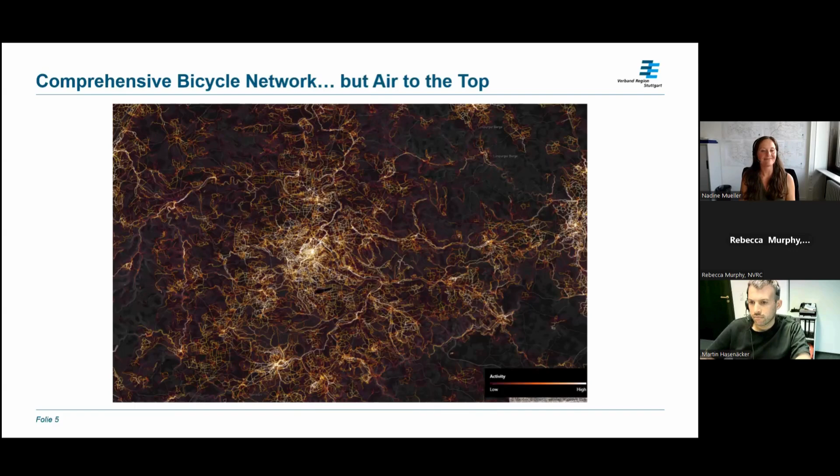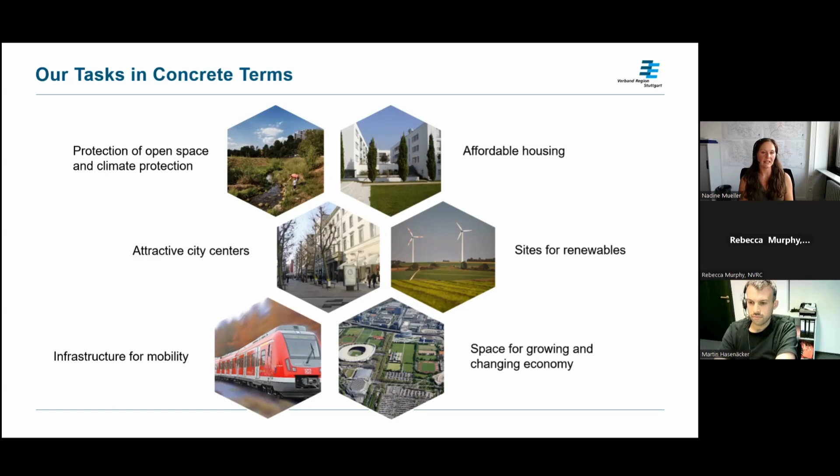To get the holistic approach of the Regional Association of Stuttgart, our major tasks are in regional planning and spatial planning, where we protect open space. We have the duty to plan and finance the metropolitan train, search for sites for renewables, and affordable housing. So these are all our main tasks.

When it comes to mobility, we have a unique position in consideration that we have a compulsory task by law to have a sustainable regional mobility plan for the functional urban area of the Stuttgart region. This is due to the fact that we have a lot of authority for the S-Bahn, which is a very important transport mode that a lot of people use every day.

With this sustainable regional mobility plan, which complies with EU regulations on how a SUMP should look, we provide technical explanations for our regional plan. Because the regional plan guarantees space for infrastructure, and then the sustainable regional mobility plan explains the transport-related determinations for that, so which measures need to be done.

So it's an integrated action plan that covers rail, road, bike, freight, logistics, and so on, even though we don't have authority when it comes to planning for all of these transport modes. It's an action plan that considers all of the transport modes and the interactions between open space, settlement, and mobility.

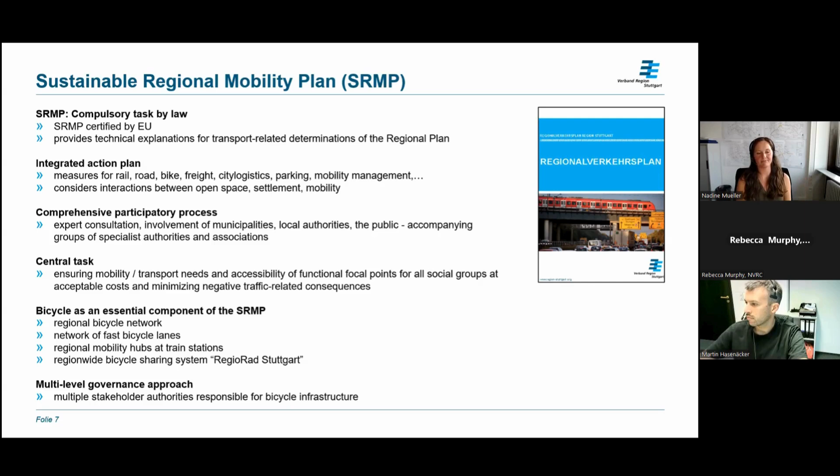Then we have regional mobility hubs, which are multimodal hubs at train stations that should also support biking, because we have a lot of facilities there needed for bike and ride, for example. And then we have a region-wide bicycle sharing system, not just in one city but in the whole region, called Regiorad. So these are the main components that we have.

So let's start with the first one. The regional bicycle network covers the existing bicycle lanes on the state level, the county level, and the local level. Together with the authorities, we identified 72 measures important to improve the bicycle network on a regional scope and to improve and guarantee accessibility, so that the major centers like Stuttgart, and also the middle and small centers, are accessible by bike. It focuses mostly on daily traffic, so for commuting, bike commuting, and so on.

These measures are undergoing regular monitoring. Every 2 years, we monitor how the measures are going and how the process is developing. At the moment, 30% of these measures are already realized or in realization. So this is one of our main concepts.

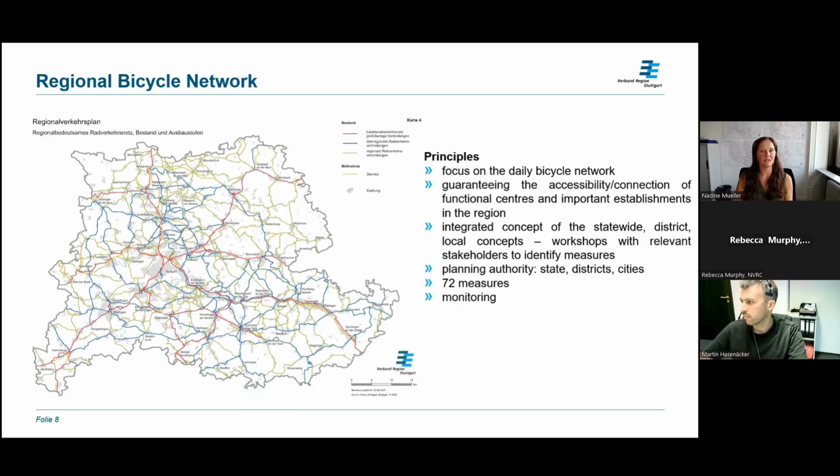And then I will head to the next one. This is mainly an initiative of the state of Baden-Württemberg, which has the goal to have at least 20 fast bicycle lanes by 2030, to offer car drivers a great possibility, instead of commuting with the car, to commute with the bike.

So this project should really influence a shift from the car to the bike. The counties, cities, and state are responsible for building and planning this infrastructure, and the funding comes from the national and state level. Our role in this fast bicycle lane project is to coordinate on the regional level.

These yellow corridors show where we did feasibility studies with our transport model. We came together and talked about important connecting points, preferred routes, and space on the regional level that can be kept free for these lanes in planning. So this is our role here.

In green, you see the already realized parts of this network—one here and a little bit here. The purple ones are the preferred routes at the moment, but still in the planning process.

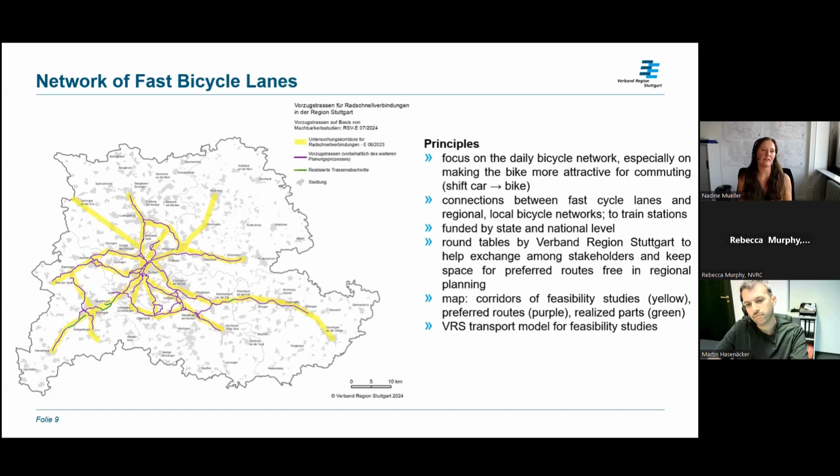But it's a great project to offer attractive and safe bicycle infrastructure for the people here. Our transport model was the basis for these feasibility studies that counties and cities could use to find potential preferred routes.

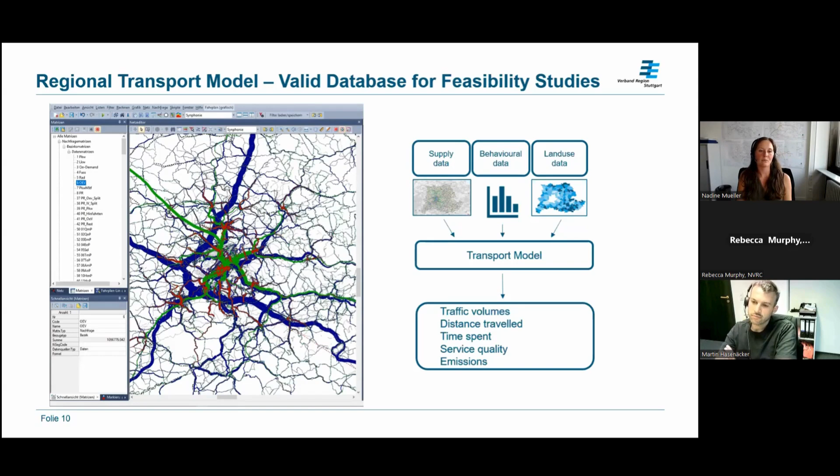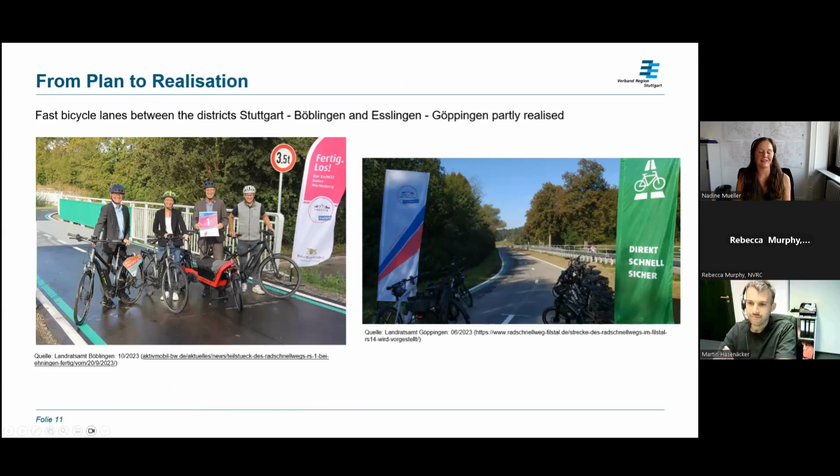Other activities besides these 2 networks and grids that we are supporting and monitoring are projects like these, for example. We have a co-funding project called regional mobility hubs.

We have these mobility hubs at certain train stations, with criteria they have to meet to be implemented. Cities get co-funding from us if they have safe bicycle facilities, Regiorad bike sharing stations, car sharing stations, access to the train, and bike-and-ride or park-and-ride facilities. So all these multimodal possibilities are co-financed by us.

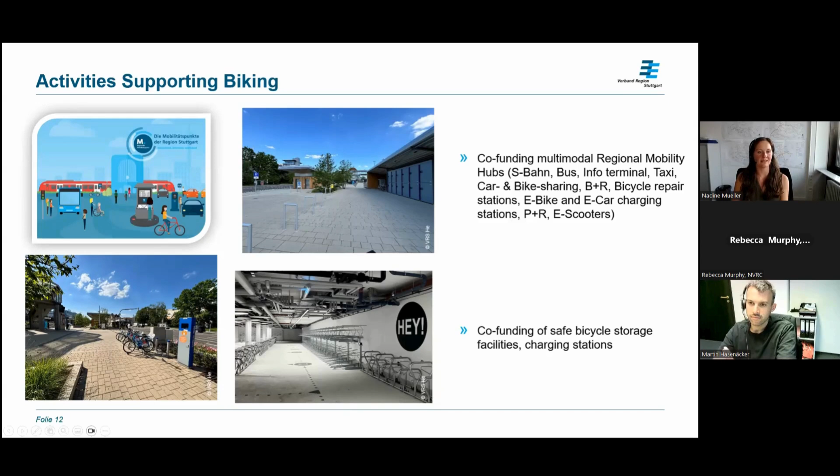Last but not least, we have a regional bike sharing system called Regiorad. You see the blue bikes there—we have a pedelec and a normal one. We have around 30 cities in the region with 230 stations. Yeah, so far so good.

These were the main projects focusing on the bicycle. On my last slide, I would like to underline again, from the regional planning scope, our integrated planning approach, where we always try to connect open space planning with touristic bicycle infrastructure planning.

This is just one example where we upgraded, again with a co-financing project, an already existing regional bicycle route with new signs, a better surface. We have covered seatings here along the route so you can enjoy the landscape, and other things that underline the characteristics of the landscape in that region.

This cooperation was together with 2 districts from our region and 17 municipalities. This is also one of the nice co-funding possibilities we have, besides other planning authorities, because like I said, in bicycle planning we don't have hands-on authority, but we try as best we can to support making the bike more attractive through such projects.

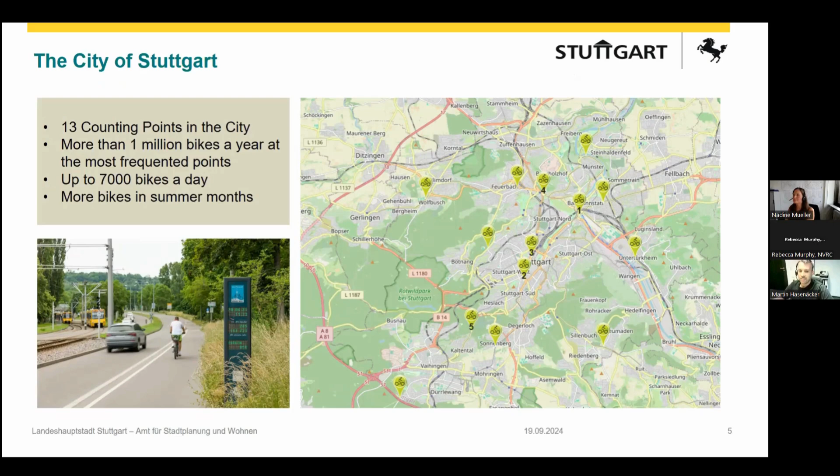We count bicycle traffic at 13 locations in our urban area, and this always gives us a good overview of the development of cycling in the city. Of course we get a lot of valid data, but we show that every biker counts, and bikers like to ride along those counting stations and see one more that day.

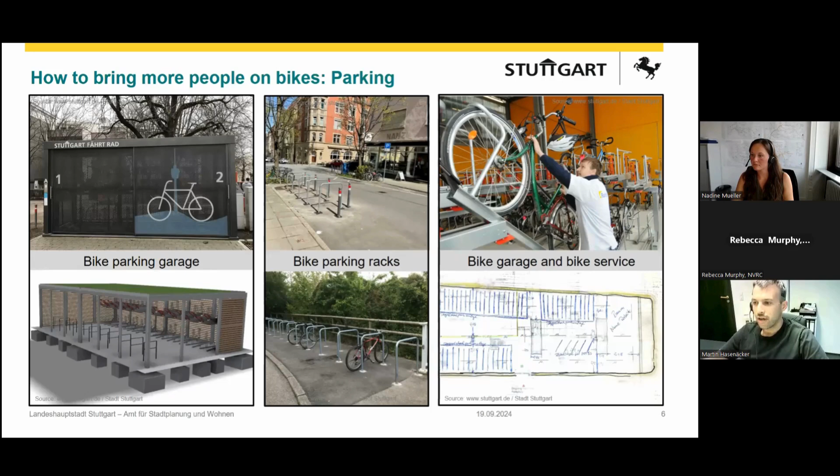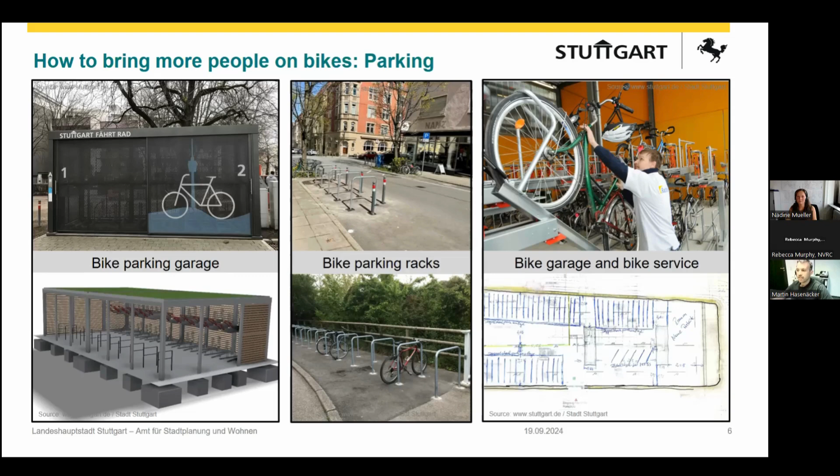What else do we do? Parking is a very important part of bicycle planning, and people use their bikes when they are easily accessible. We offer a wide range of parking facilities in residential areas, at train stations, and at leisure destinations. Sometimes they are free to use, sometimes covered and lockable, and sometimes even with a repair service.

What else we do is we have developed a navigator specifically for cycling and the combination of cycling and public transport for Stuttgart and the region of Stuttgart.

The connection between public transport and cycling is very important to us, especially in our hilly region. Some people want to cycle downhill. They're living uphill, working downhill, cycle down, but after a hard day of work, they don't want to cycle back up again. So we have a streetcar and a bus where you can take your bike with easy access and good prices to come back home without cycling.

This connection between biking and using public transport is very important to bring more people on bikes.

You heard a lot about Regiorad - Nadine talked about it, and of course Stuttgart supports Regiorad too. We have a lot of stations where you can rent a bike and just go to the next Regiorad station. This is very important for the connection between public transport and riding bikes.

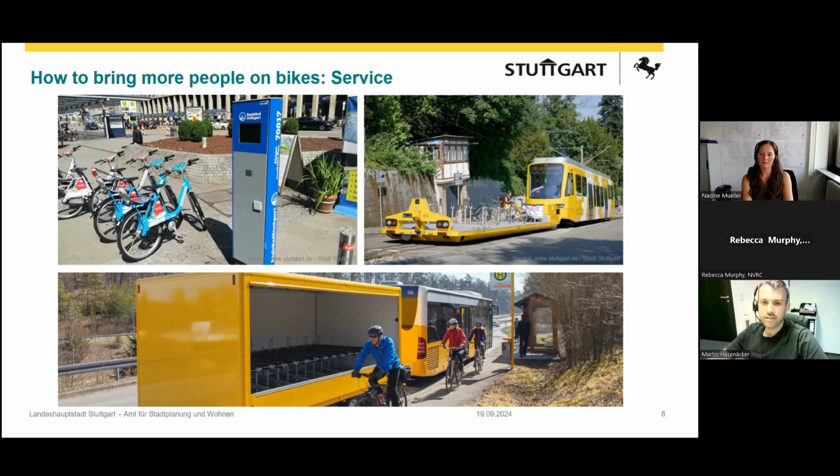Lastly, before I talk about infrastructure, good communication is very important. We are using Instagram as well, but also the traditional way with information events and political bike tours. We meet people who are interested in cycling in Stuttgart, going around and talking about measures or what we can do to support bikers more.

The regional network Nadine already introduced also runs through Stuttgart, but we also have other local routes so our network is denser overall. Of course, we are still at the concept level here - not everything has been built yet. The fast bike connections in particular are still very new for us; we haven't built any of these in Stuttgart yet, but we are in the planning stage. The same applies to our local network.

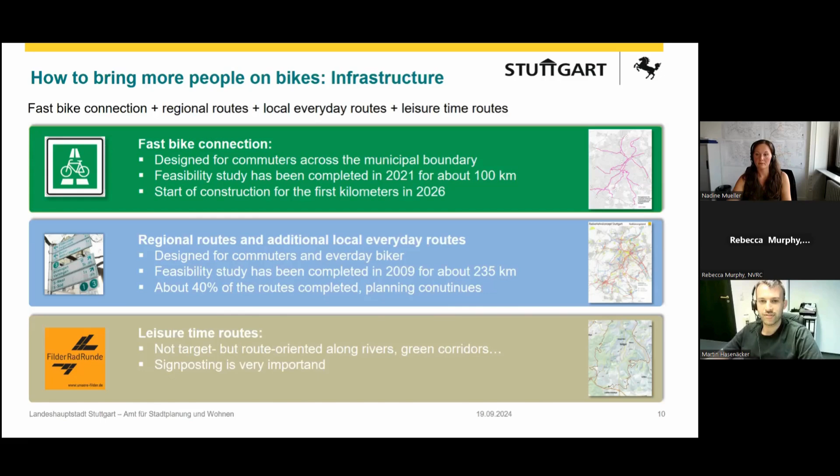Today we have implemented around 40% of our routes in Stuttgart, and we are planning and working along with it. Here we see that the network is a lot denser in the city than in the region, and a lot more than in the outer villages of Stuttgart.

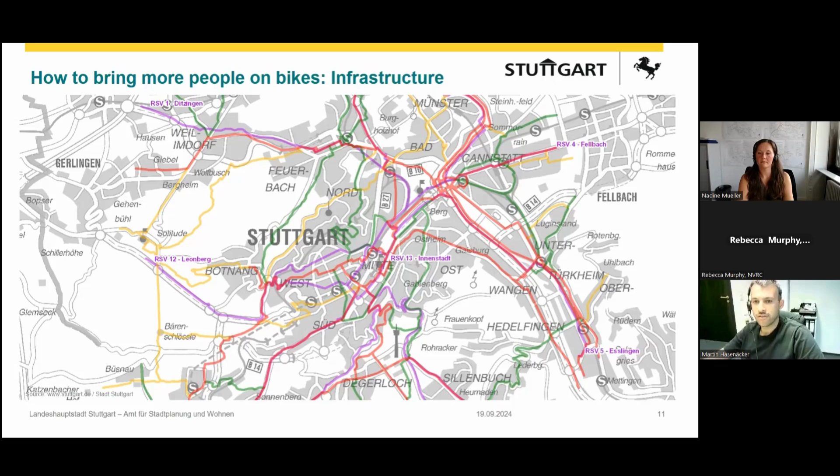Okay, let's talk a little bit about the planning process. How does it work when we plan a route? We want to promote cycling, and this is reason enough for us to start planning and create a concept. It's very important to us to involve citizens and politicians in the process at a very early stage so that we can achieve a good result.

Once the pre-planning has been completed, our local council decides on the planning. They discuss it a lot, and they have to approve the financing for the project. Afterwards, after the resolution of the concept, we get into detailed planning before the new route can be built. In Germany, or in our city, it depends a little on the project, but to finalize a route from the very early concept stage to the building, we sometimes need 5 to 7 years.

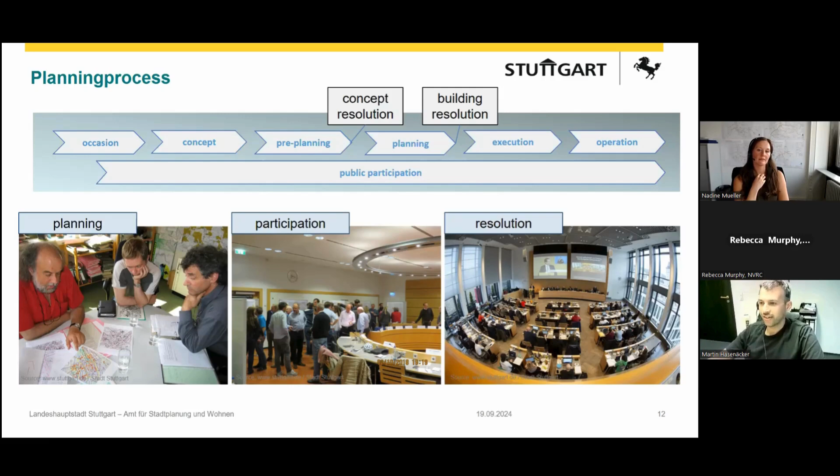So we are not that far or as fast as we want to be. Here you can see more or less the same thing, but visualized.

My part in the city of Stuttgart is the concept and the pre-planning, which is within our urban planning and housing department. That's what I do. Afterwards, we have the civil engineering department, which plans the more detailed aspects, and then they build the route.

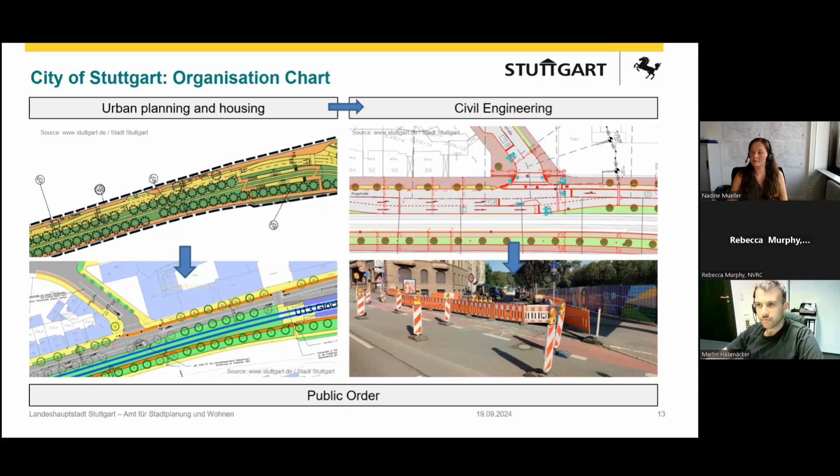Before I show you some examples on our route number 1, I want to talk a little about how we choose the right infrastructure for bikers. In Germany, we look at how much traffic is on a road and how fast people are allowed to drive. Then we decide if we need a separated bike lane, or if mixed traffic, mixing cars and bikes, is possible for us. That's how we start the planning process and concept our bike routes.

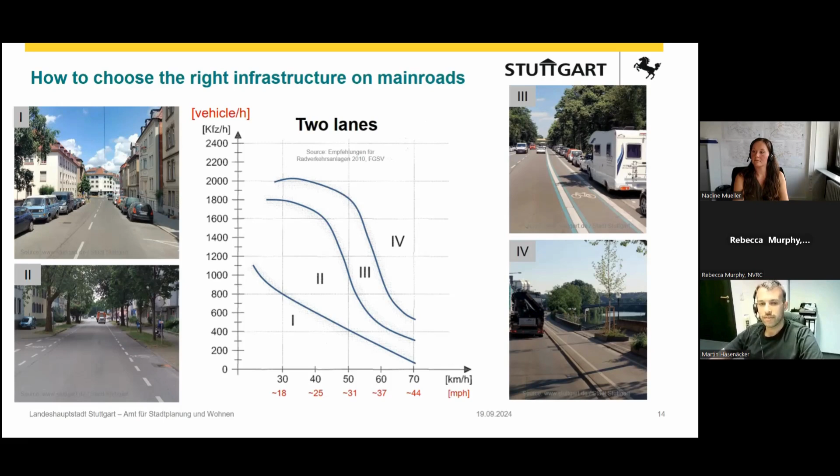I'll show you 6 examples along this bike route.

In Germany, we distinguish between dashed lines and solid lines. Bike lanes with dashed lines may sometimes be used by cars, while solid lines are only for bikers. Generally speaking, the solid line is better, but it requires more space. In our dense city, sometimes we don't have as much space as we need for very good infrastructure, so sometimes we use dashed lines as well.

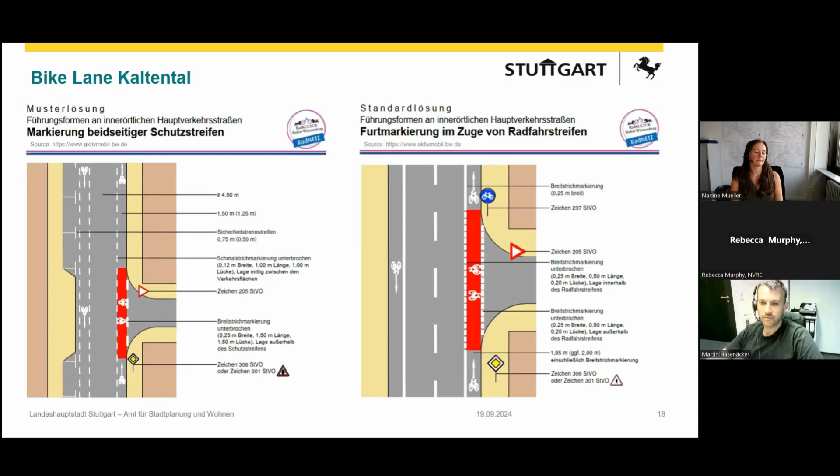What else? There is a new crossing of a street, and here we created a new setup for cycle traffic. What's special is that we can detect the bicycles very early using a detector, so in the best case, the traffic light turns green immediately, so you don't have to wait, and you can cycle along without waiting a second.

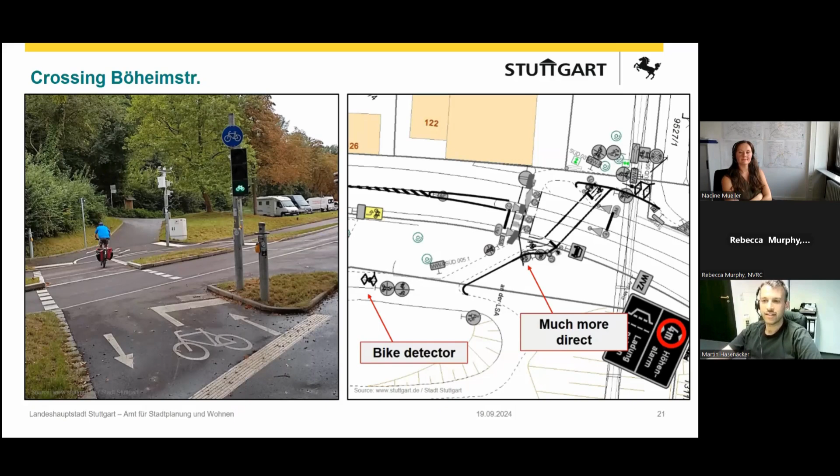And this is an example for a bike road in Möhringer Straße. I don't know if bike roads are common in the US, but we are planning the bike roads in the subordinated traffic network. So these are streets which can only be used by car if you are a resident in the street, if you're living in the street, and priority is for bikes.

And priority you get on every intersection, so you don't have to wait on the intersection to look if a car comes from another side. So you can just pass the intersection. And very important for us is to make very clear marking to make sure everyone knows that this is a road for bikes and just for cars if you are living in the street. And the speed maximum is 30 kilometers per hour.

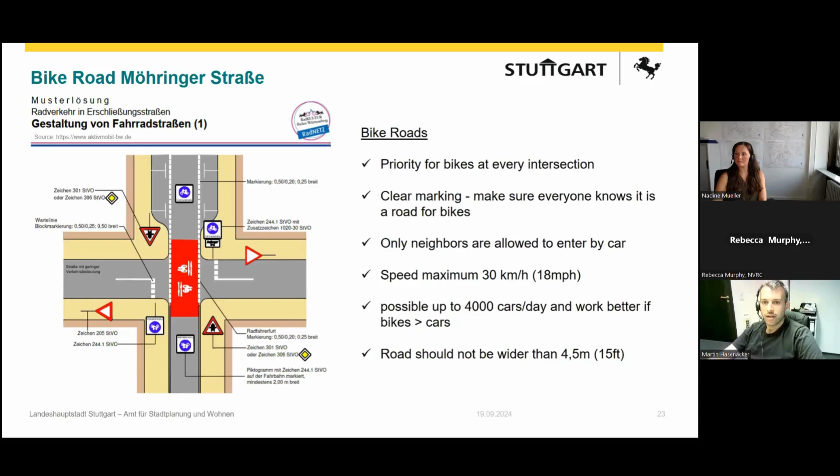In Stuttgart, we have now a lot of them, and on our bike route number 1 as well. And they're looking like this, and we have very clear marking. We choose a color that everyone in Stuttgart nowadays knows, okay, this is a bike road, and you can't enter, and you have to give priority to bikers.

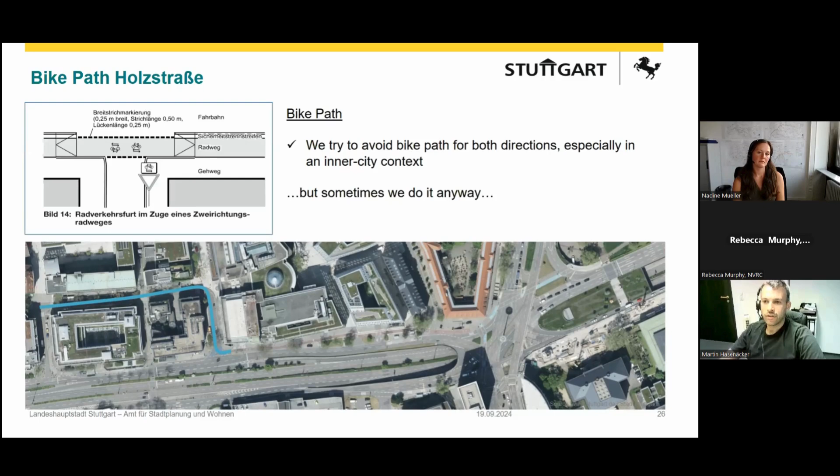This is an example for a bike path in the city center, and normally we try to avoid bike paths, especially for both directions, in the inner city context. But sometimes it's difficult to cross the street, for example, like you can see here, there's a very, very big highway. You can't cross it at the point where you arrive. And so we offer bike paths for both directions.

But it is very dangerous, especially on accesses to, for example, parking garages, like in this example, because drivers often do not expect that bicycles come from both directions. They are always looking to the left and not to the right. And so sometimes accidents happen. This is why we try to avoid bicycle paths for both directions, and we try to build them just for one direction.

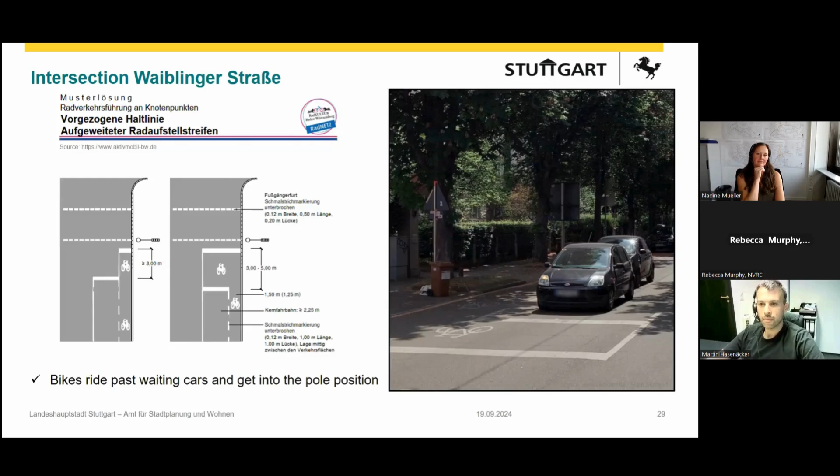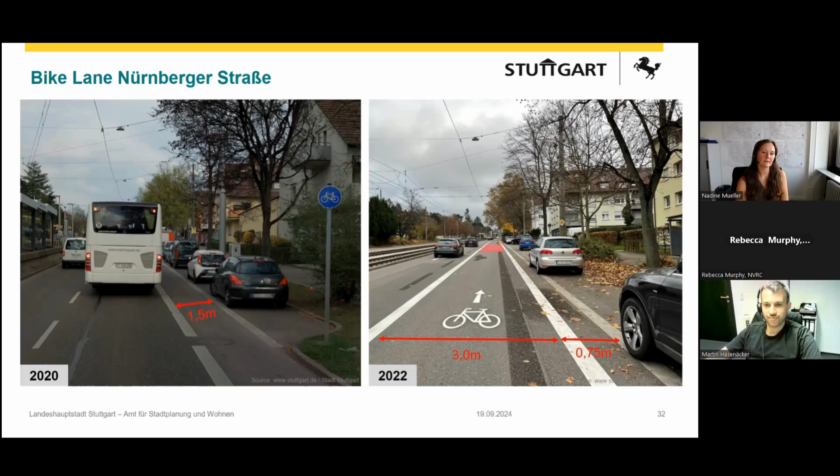If you're interested in the sketches, they are from a manual that can be found for free on the internet as well, and there's a link you can have a look inside if you want to. And this is what I wanted to tell you about bike planning in Stuttgart, and thank you a lot.

Great, thank you so much, Nadine and Martin. This has been so interesting. I see a number of questions in the Q&A box because I think people in general are very intrigued by the differences, in terms of funding, in terms of even just placement of these bike lanes in the street. As much as I'm familiar with, I've never seen anything like having a street dedicated to a bike lane. So even simple things like that are fascinating.

But why don't we go ahead and jump into the Q&A, and thank you, Nadine, for also answering a few. I guess the first question is from Jeff. He says, we have so much to learn from your beautiful region. We are noticing a change in the USA transit systems that are allowing for more scooters, bikes, etc., to come into the train, subway, and buses. I guess his question is, how are you dealing with this issue? And for Martin in particular, has the e-bike adoption challenged the design speed for your facilities design and planning, or any major increase in e-cycling, positives and negatives? It's a big question, so maybe pieces of that, Martin, as you can.